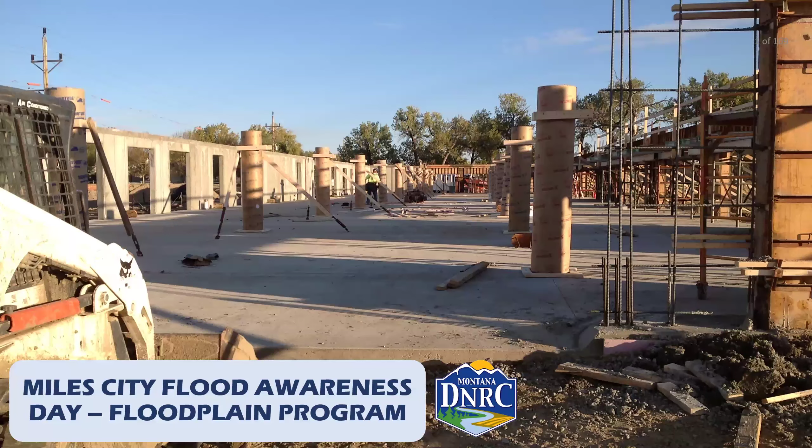As Sam mentioned, my name is Tracy Sears, and I'm part of the DNRC Floodplain program, specifically the Community Assistance Program. There's three of us in the program: myself, a coworker Shailia Wingard, and rounding out our team is Anthony Joyce.

We try to work with local communities, and we also have property owners that reach out to us from time to time. One of the things we try to do consistently is put additional information out there, especially on our website. I know Miles City has a great website, but if you're looking for additional floodplain information, please jump over to our website and hopefully we'll have some information for you there as well.

Not only am I part of the DNRC program, but I'm also the Montana National Flood Insurance Program Coordinator. One of the things the Community Assistance Program does is work very closely with local communities and floodplain administrators such as Sam Malinowski and Miles City.

So today we really want to briefly go over floodplain management, the floodplain regulations and building structures, compliance, and the benefits of the community rating system.

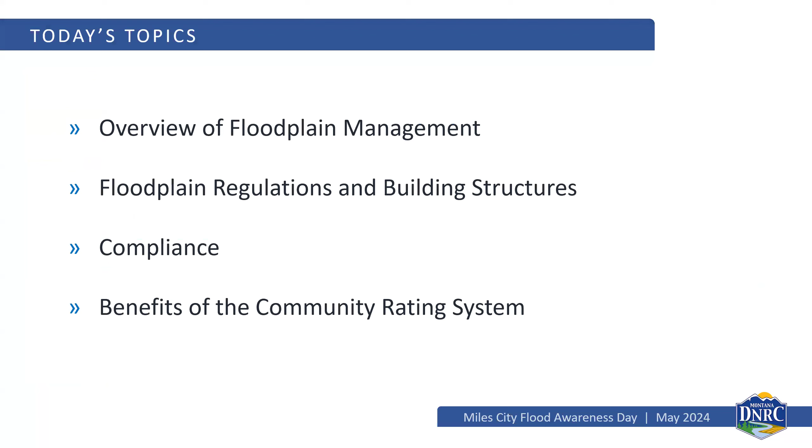We just want to start off talking about floodplain management in the nation, starting essentially with the National Flood Insurance Program back in 1968. But even before 1968, we had tried to figure out as a nation how to deal with this issue that we had called flooding.

Most communities were impacted by it. And since 1924, we didn't have private insurance companies — they were no longer selling flood insurance. So for quite a while, as a nation, this was the top priority: how do we deal with flooding?

And of course, what they came up with is what they had originally called the Unified Floodplain Program. When it went before Congress, they really emphasized flood insurance. I know that Aaron May is going to come up after this presentation to talk about insurance, and we'll touch on it just a little bit.

One of the things about that unified program was that there are four parts to it, even though they emphasized flood insurance. One is flood insurance, another is knowing your risk — floodplain identification and mapping — and then floodplain management, which plays a huge role that falls on the local community, such as Miles City or Custer County. And then, of course, flood mitigation.

As we get into all this information about floodplain management, and specific information about building in and around these high-risk areas, the biggest thing to remember is that the whole premise of this program is to reduce flood losses and flood damage. That was the whole reason this program was established.

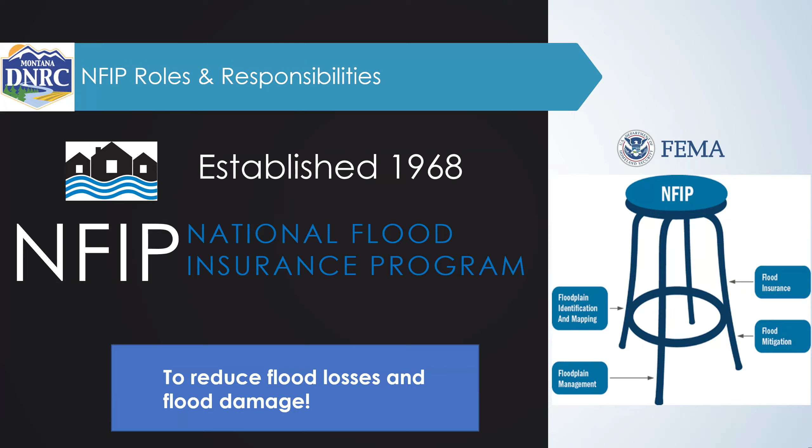I know we have a lot to cover in a short amount of time, but I wanted to emphasize that in the state of Montana, they were looking at this national program and saying, wait a minute, we as a state need to step up. One of the things we needed to do was provide assistance to the local communities. We know this program is going to be complex. So back in 1971, when they passed the state standards for Montana for floodplain regulations...

One of the things they emphasized is an entity that would provide technical assistance to the local community, and they said DNRC was going to be assigned that task. The other thing they did was take those originally proposed regulations that came out of that unified program that went to Congress and said, we're going to adopt those standards. What ended up happening was Montana is one of three states that have these higher standards.

One of those standards that a lot of you in Miles City are well aware of is this 2 foot of freeboard. All of this, when the state actually adopted this program, occurred right around 1971. Ironically, nationally, what we're seeing is that these higher standards that Montana has had in place since 1971 are now slowly becoming national standards.

HUD just adopted some regulations for any of their programs, and one of the things they incorporated was this 2 foot of freeboard, same thing we have in the state. I know there are changes coming down nationally, and one of the biggest things proposed was to bring back that 2 foot of freeboard.

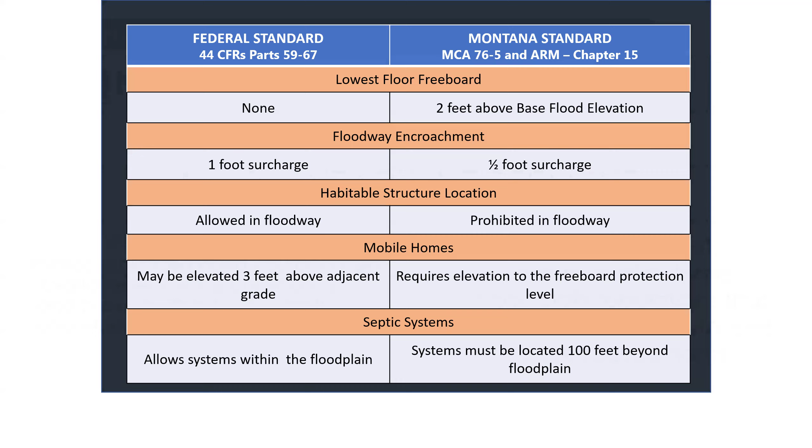Even though we see it as a higher standard in the state of Montana, it was actually a minimum standard that was proposed when they were originally talking about the program to Congress. So in Montana we'll be pretty good because we've been dealing with that 2 foot of freeboard for a very long time. So when we look at the National Flood Insurance Program, it's important to understand that this is a voluntary agreement.

When a community enters into joining the National Flood Insurance Program, they're saying we're going to adopt and enforce these floodplain regulations that meet or exceed FEMA and state regulations. In return, the federal government says we'll make available flood insurance to anyone within the community, not just the high-risk area, if your community is participating. Also, we'll try to provide some disaster assistance and other funding opportunities. That's the basic agreement between the federal government and the local community.

What makes up that special flood hazard area: you have the area designated as floodway, and we'll get into this in a moment. That's kind of where you're seeing the deeper depths and higher velocities. Then you have an area outside of that called flood fringe, and those are areas where you'll still see inundation, but it might not be the velocities you'll see with the floodway.

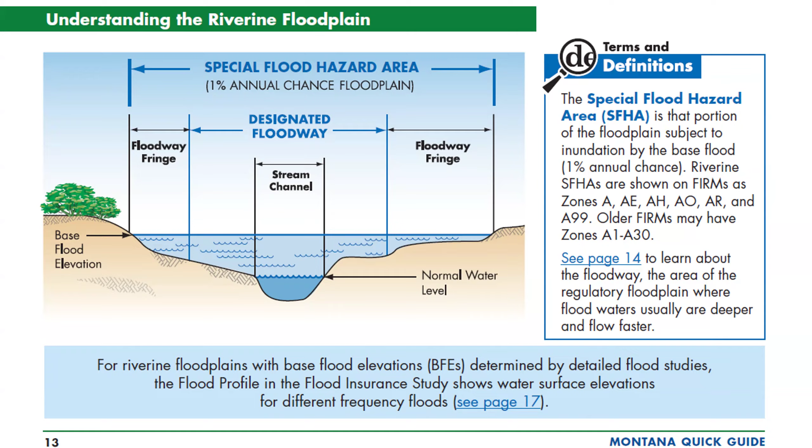The reason I bring this up is because these areas are tied into your regulations at the local level. Miles City and Custer County have both adopted floodplain regulations, and there are certain requirements and things prohibited in the floodway, same with the flood fringe. So it's important when doing any development in these areas to understand what location you're in. It's great that you have good resources, especially in Miles City with Sam Malinowski, and with the county, Mike Rinaldi, and I think the commissioners help out with this as well.

So the area outside of this high risk area that's not identified would be considered low risk, and sometimes it's also referred to as moderate risk as well.

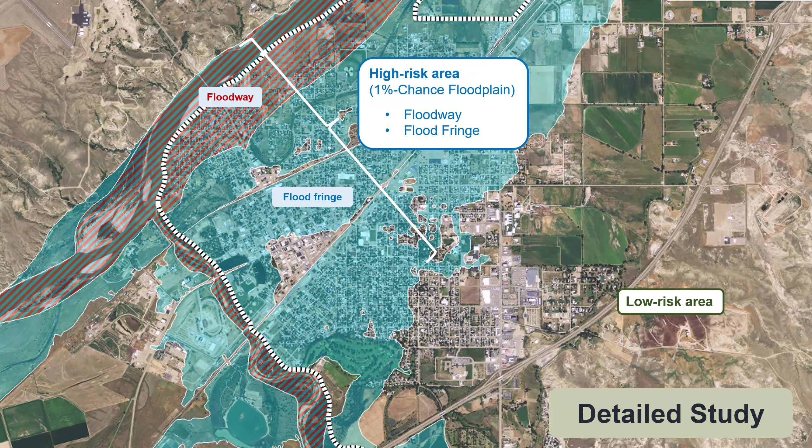So why is it a big concern with these high risk areas? The whole program, the local floodplain program, the National Flood Insurance Program, it's all based on how do we manage existing structures and new structures and development within these high risk areas. The reason for this is because there's a 25% chance of flooding during a 30-year mortgage for structures in these high risk areas. That's not to say everything outside those areas isn't vulnerable. Every property is vulnerable to flooding, but there's a higher chance of flooding in these particular areas.

Also, mandatory flood insurance requirements apply to any structures in the special flood hazard or high risk area, for federally backed mortgages. Floodplain permits are necessary for any type of development, and development is any type of man-made activity. So if somebody's doing anything on their property, before you do anything, we encourage you to reach out to your local floodplain administrators and talk to them about what you're proposing. They will be able to provide guidance and information, which could possibly lead to getting a permit application and going through that permitting process.

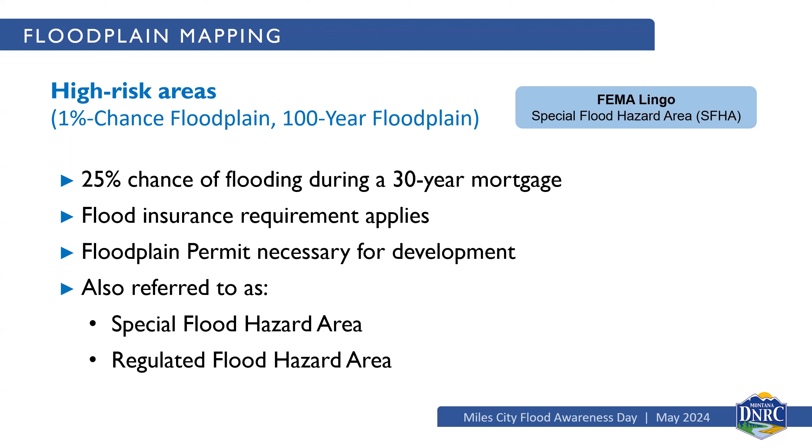We also refer to those high-risk areas as the special flood hazard area, and in both Custer County and Miles City floodplain regulations, they talk about the regulated flood hazard area. It's the same thing, but it provides an opportunity in that regulated flood hazard area to pull in other information that might be used for management of the floodplains in that particular area. That moderate risk and low risk area is not identified as a high risk area. These again are lower risk.

They can account for, as you can see, 20% of flood insurance claims nationwide. And I think this number's kind of gone up a little bit over the last few years, and I know Erin can kind of help clarify that as well.

Flood insurance is recommended. Now, one of the things that we do talk about, and I know that the next presenter is probably going to talk on this too, but any lender can come back and say, look, we want you, if you have a loan with us, we want you to carry flood insurance as well.

Now, for Miles City and Custer County, floodplain regulations do not apply in these areas. We do have a couple communities in state that do regulate outside a high-risk area, but it is not Miles City or Custer County. And this area also includes what they would refer to as the 500-year floodplain, or the 0.2% chance floodplain.

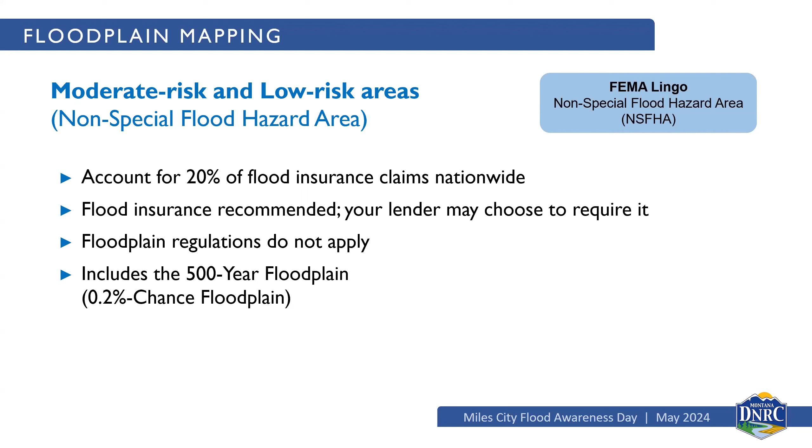And as we get into looking at how to build specifically in these areas, we do want to look at one of the biggest issues or items that you'll have to deal with in any type of development in these areas. You're looking at that particular project and how it relates not just to where it's located in the floodplain, but also what you're planning on doing and where is it in reference to that base flood elevation. So that's the elevation on that property of where that 1% chance of flood can occur.

And really, it changes depending on where the property is located. It's shown on the maps as an estimate, but the exact location, or the exact base flood elevation, you can obtain through that flood insurance study.

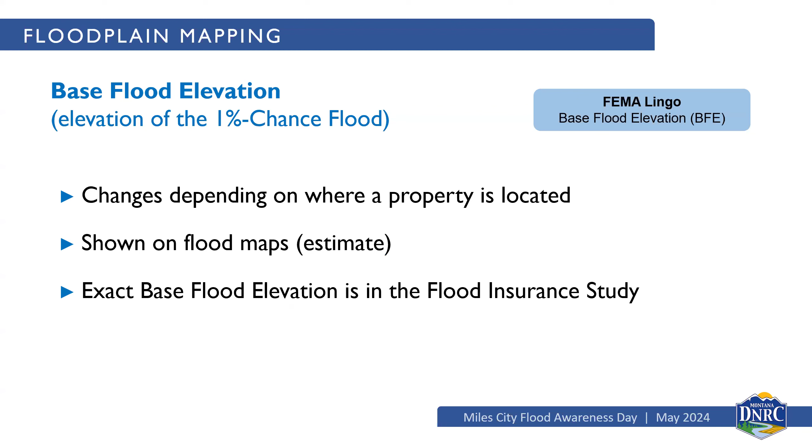Miles City also has copies of their specific flood insurance study for Custer County. You can access this information through Miles City and on their website. You can access it through the FEMA portal as well. This will give you information about what are those cross sections, where's the base flood elevation in this particular location. It gives you a data source. It's a really good reference.

And again, you don't have to be an expert on this. You can always reach out to your local floodplain administrator. They can kind of help you look at your area and understand what that base flood elevation might be in that particular area.

There's also, as we mentioned, the ordinance that not only Miles City has, but also Custer County. They're two separate ordinances. But those ordinances for floodplain management actually list all the regulations that you'll need to do. It also gives a lot of information about what you need to submit, what is going to trigger a permit, which again, any type of man-made development in those high-risk areas. It gives a lot of information about that local floodplain program. It actually even identifies what office or entity is responsible for floodplain management within the community.

On our website, and I think Sam has a few of these in her office too, there is a quick guide. It gives a brief overview of all the regulations, and it really correlates to those local ordinances. So if you're looking at what is a substantial improvement, you can quickly find that. Or if you're looking at information on what an elevation certificate means, you can quickly look that information up. Sam might have some hard copies in her office, but we also have this linked online through our website as well.

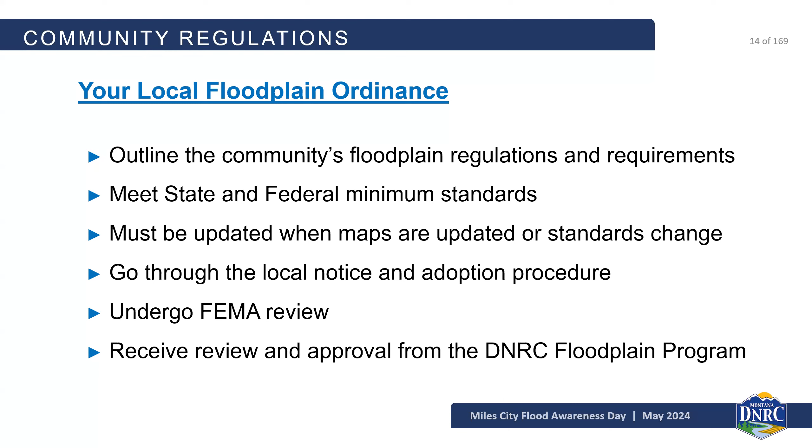And within those local ordinances, the main thing is talking about the floodplain permitting process. And as we mentioned a couple of times this evening, talking about what triggers a floodplain permit. And it really comes down to any type of development that would be considered man-made activity.

Just again, reach out to Sam. She'll be able to help you.

One of the things that's hard about the permitting process for local communities is that there's this federal regulation that states that before the local community can issue that floodplain permit, they have to be assured that all other local, state, and federal permits were acquired for that particular and proposed project. There's a lot of materials out there that can help you if you're working along streams.

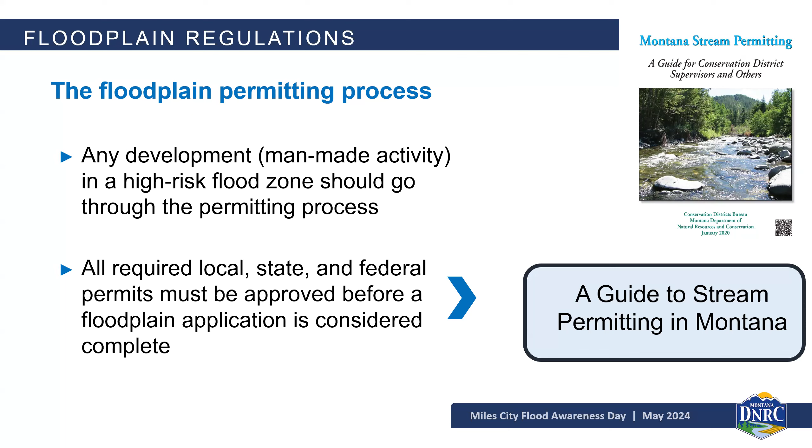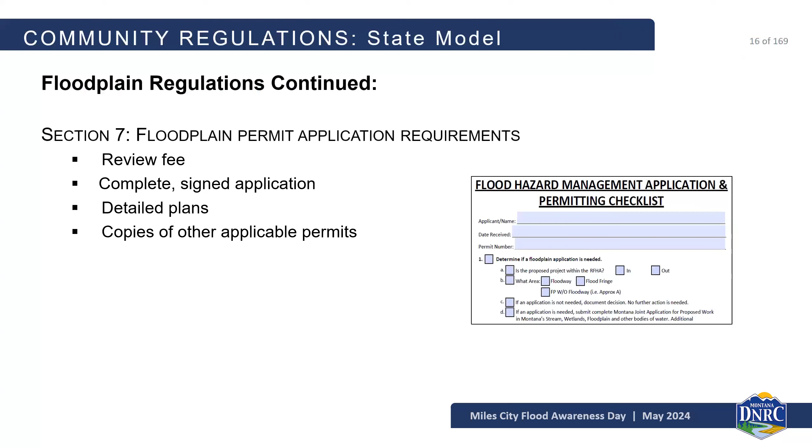Now, there's some key documents. This is stuff that your local floodplain administrators can help you with. If you have a project, we encourage you to talk with them beforehand. That's going to make the permitting process go a lot smoother for you. Let them know what you're looking at and planning on doing. They can help guide you on what information within those regulations will pertain to that particular project you're working on, and what you need to submit for the community to review and make a decision on that application.

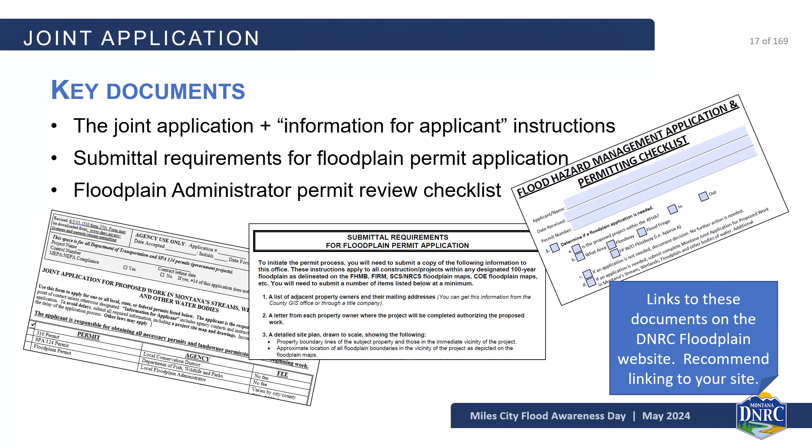I always tell people, make sure that when you're filling this information out, especially that joint application, make sure you're filling it out and addressing all of this information. It should be that somebody can pick up your application, whether it's the community or somebody from the public, and really be able to understand exactly what you're proposing and what you're doing there as well.

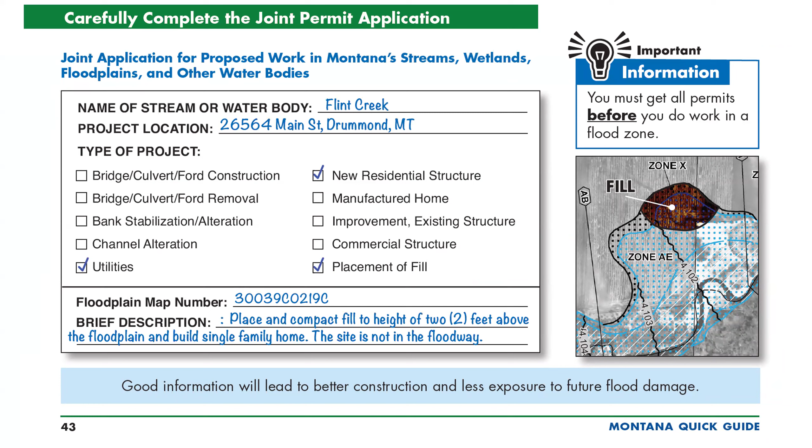Some of the things we talk about is looking at what are some of those steps for review. I know, as a property owner, one of the things I look at is I really want to know, like, if I have to put up a fence, what are the regulations that I need to follow, or what are they going to look for?

This is just kind of a key step in what that reviewer is going to look for. The main thing is making sure that whatever's being done on that particular property, it's not going to adversely affect not only your property, but adjacent property as well, and that it's being built safely.

One of the reasons we really emphasize this is understanding that any new structure that's built, especially for residential structures, the lifespan of a residential structure is typically anywhere between 50 and 70 years now. And so it's not just going to be one person that owns that structure, it's going to be multiple people. So you want to make sure it's done in a safe manner.

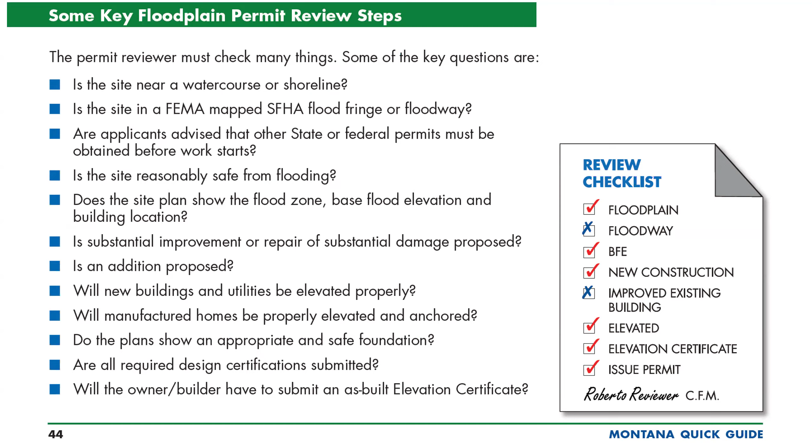So when you get into those regulations, one of the things Sam had asked us to really focus on is the development requirements. In section 9, it talks about development requirements in the floodway. Now that's that area we showed that had the hash mark throughout Miles City. And there's some very specific guidance on if you're proposing any development within that area.

One of the things that's really important to understand is that any encroachments or anything you're doing there cannot create what we call a rise to that base flood elevation. So in that floodway, you can't create a rise. There's a document we'll talk about here in just a second. There's also guidance for different types of uses, such as mining, railroad, highway, and stream crossings, looking at embankments or utility lines, storage of materials, stream bank stabilization, and also flood control.

And then there's also a section on existing residential and non-residential buildings. It's important to understand that this program was looking at what do we do with new development, new structures, and what do we do with existing development that was there before these regulations or these maps, and existing structures. The program looks at all those aspects of how do you make each one of these developments safer for the future. That's what the regulations really try to get at here as well.

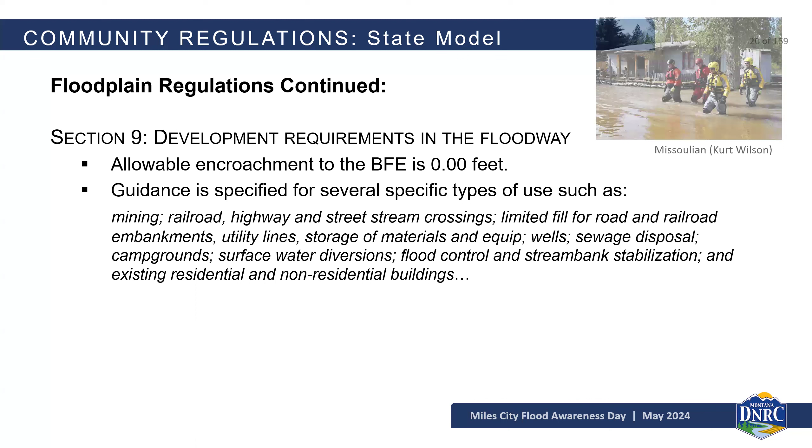So as we mentioned, when we're talking about the floodway, there are some prohibited uses. The floodway is that area where we know we can see the deeper depths and the higher velocities. And I understand Miles City has a very unique situation with that island area, and that area being mapped. We have had long discussions on this, and Sam and I have talked about this over and over again too.

I wish that would have been a little bit different. But typically, for the most part, when we're looking at a floodway, that is the highest risk. It's one of those areas you really want to keep clear from development, because they are not only at risk from losing whatever development they do there, but it could impact other property owners as well.

Now, it is different from that flood fringe. That flood fringe, again, is that blue area you see at the corner of this picture. Now, the insurance requirements are the same. They still have that mandatory requirement for any federally backed loans, but there are more restrictive floodplain regulations when you're in that floodway.

One of the things they state is that you cannot establish any new structures. Now, we talked about existing structures - they are handled in a different manner. You might be able to replace those. They still have to come into compliance if it's in the floodway. There are a lot of factors that go into it.

Again, if you have a structure in the floodway, definitely reach out to Sam and talk with her about what you're proposing to do before you do any excavation or do anything in that area. It makes it a lot smoother and a lot cheaper for you as a property owner to talk that over with that floodplain administrator.

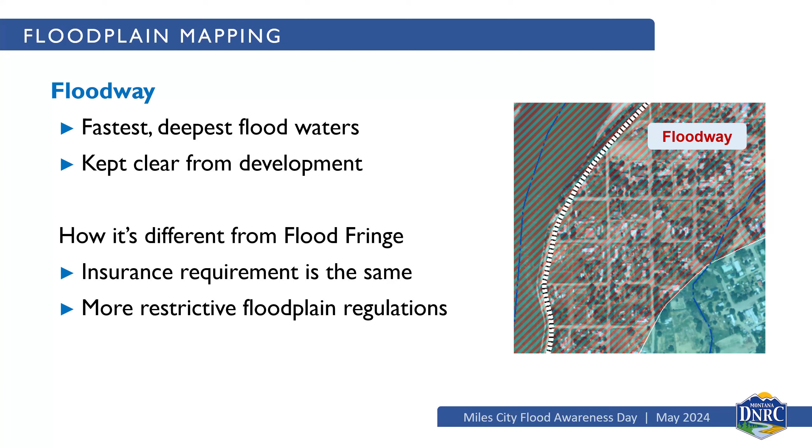So one of the things we talk about is if you're doing any development in that floodway, one of the requirements is that a project may be required to do a no-rise certification. So if they're doing new development, one of the basic requirements for floodplain permits and applications is that they have to show that what they're proposing to do is not going to create a rise to that base flood elevation.

This is something that the property owner can only obtain by hiring an engineer. This is not something a surveyor can do. A no-rise certification is something that has to be done by an engineer.

So again, you might be proposing some sort of development within that floodway. Go back to your floodplain administrator and say, hey, this is what we want to do. Anything that you can do to not trigger this requirement for no-rise is just going to make that process a little bit smoother and a lot cheaper for you as well.

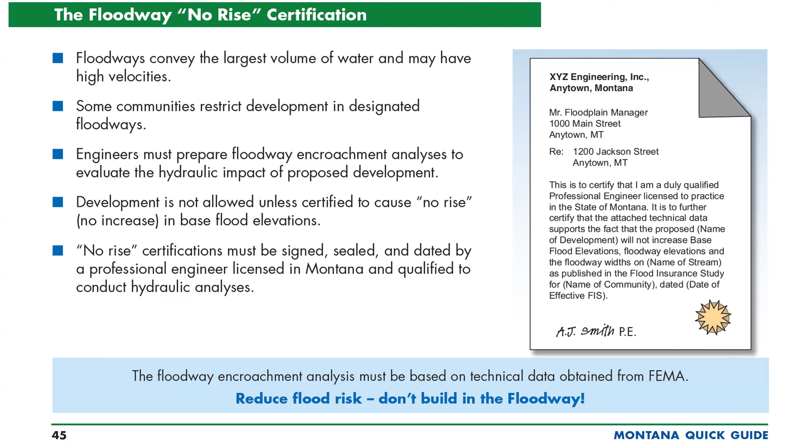So as we get into section 10 of the local floodplain regulations, now we're talking about development requirements in that flood fringe area - not the floodway, but that flood fringe area.

Again, all those uses that are permitted in the floodway carry over. As it says right here, if it's permittable in the floodway, it's permittable in the flood fringe. But anything that you do, the encroachment limit is limited to a half-foot rise.

Now, structures are allowed, new structures. Those residential structures that are being proposed will require 2 feet of freeboard. And also non-residential structures, not only do they have that 2 feet of freeboard, but they can also look at maybe doing some sort of flood proofing. So it's a little bit different than the residential structure.

The other thing to think about is if a property owner is looking at elevating a new structure on fill, it has to be 0.5 feet above the base flood elevation and extend 15 feet beyond the structure. So if they're looking at fill, they should also have the plans included about what they're doing with that structure. Where is that lowest floor going to be? How is that fill in relation to the footprint of that building? These are things that have to be considered.

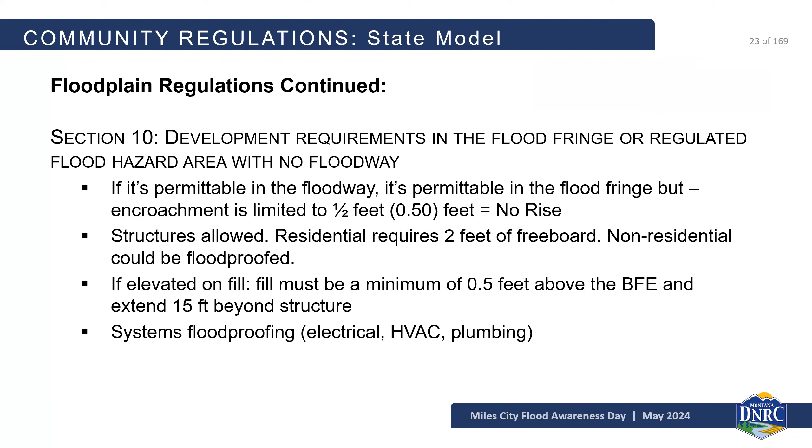Also, they're going to need to look at floodproofing their electrical, HVAC, and plumbing as well. So in that flood fringe area, it's not that you really can't build, you just probably have to build a little differently. I think all of you that live in Miles City are pretty aware of that requirement.

And again, this process is about saying, hey, we're trying to reduce flood losses and flood damage. It's not going to be just one homeowner, as we discussed. It's going to be multiple homeowners or business owners, and really trying to make sure that what you're putting in now is going to be safe now and into the future as well.

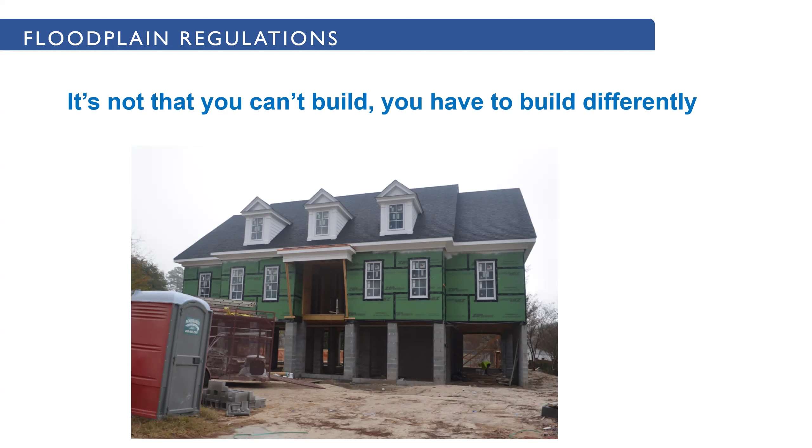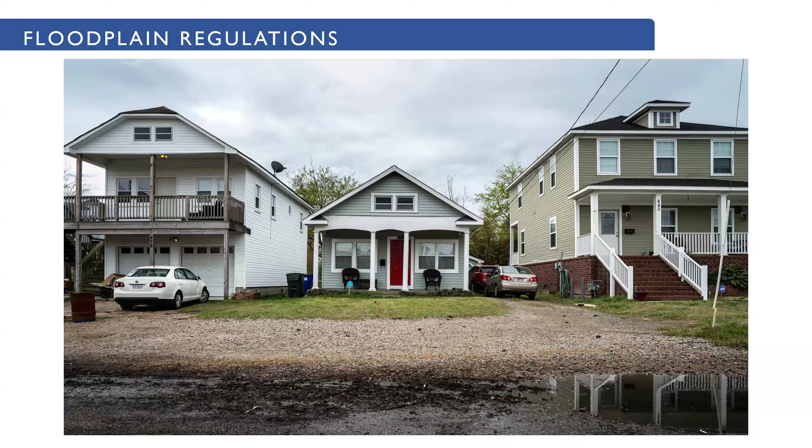But let's say somebody has an existing structure. That's something we're going to get into here in just a moment, and that's going to be called substantial improvement.

If you're building a new structure, some ways you can elevate it are on foundation walls, as long as you have openings—there are regulations about what needs to be done in that lower enclosed area. If you're elevating on fill, there's that 15-foot perimeter of fill from the footprint of the building, plus slope requirements. So there's a couple ways you can look at elevating a structure.

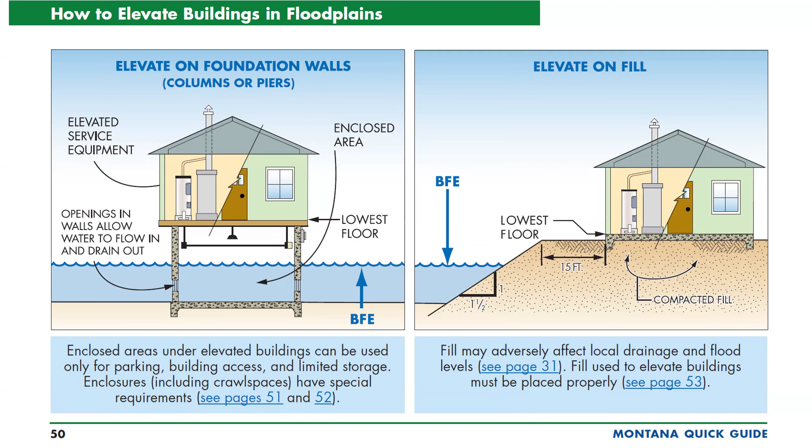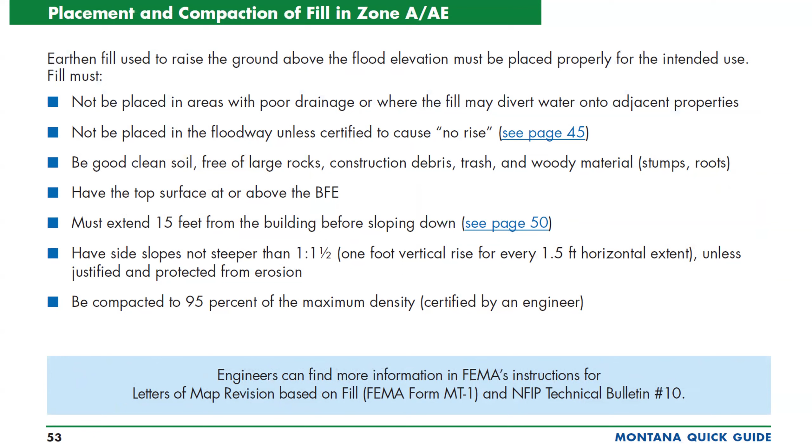When you look at the floodplain regulations, it really stresses what's required when you're adding fill. That's something you can talk to your local floodplain administrator about as well.

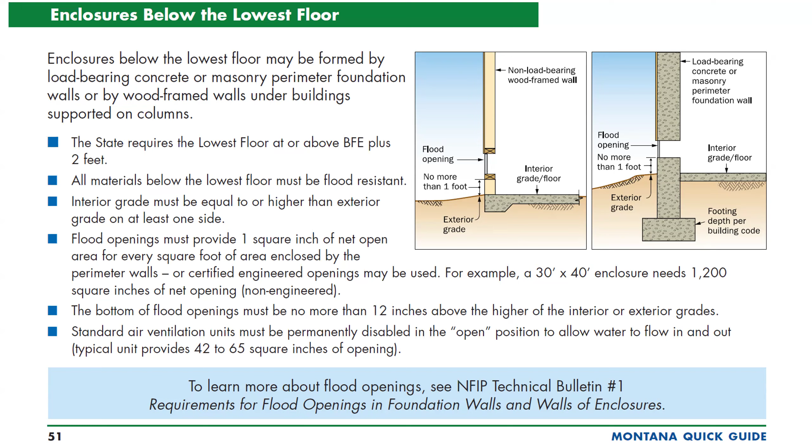Now, enclosures below that lowest floor—the interior grade or floor in the state of Montana has to be at the BFE. Even if it's at the BFE, they still need to adjust for that lowest enclosure area, that 2 feet of freeboard, which is done by adding flood openings or flood vents, something Sam has talked about numerous times within the community. A property owner could instead build the interior grade or floor to 2 feet above, and they wouldn't have to do the vent. So there's some things you can discuss on what's right for your particular project.

A lot of these flood openings have certain placement requirements—they can't be any higher than a foot from either the exterior grade or the interior grade. These are things your application is going to address, and the local floodplain administrator is going to have to evaluate. This information is in the quick guide and also in the local floodplain regulations, so it's really important to understand those documents, especially if you're building in a high risk area.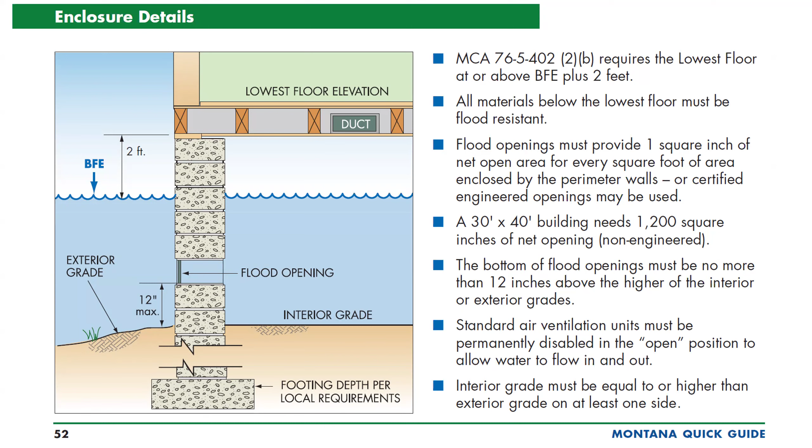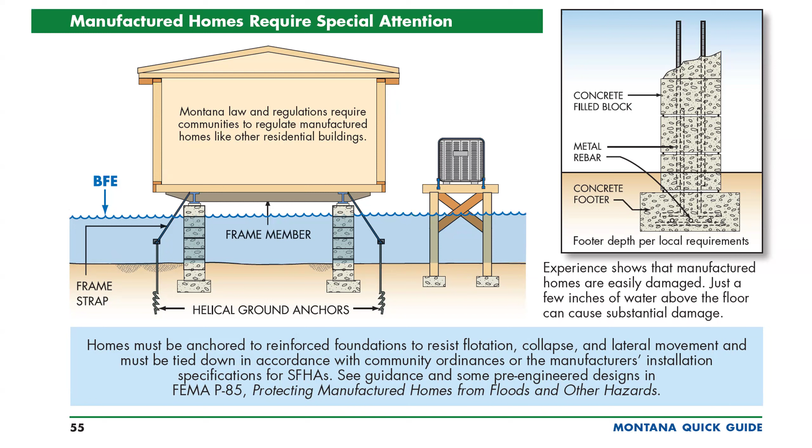Also, manufactured homes—in the state of Montana, they're looked at the same way as any other residential structure. They need to be anchored; that's one of the big things. You're looking at, if a flood comes along, how can we protect the structure from damage. So those are some of the things addressed here.

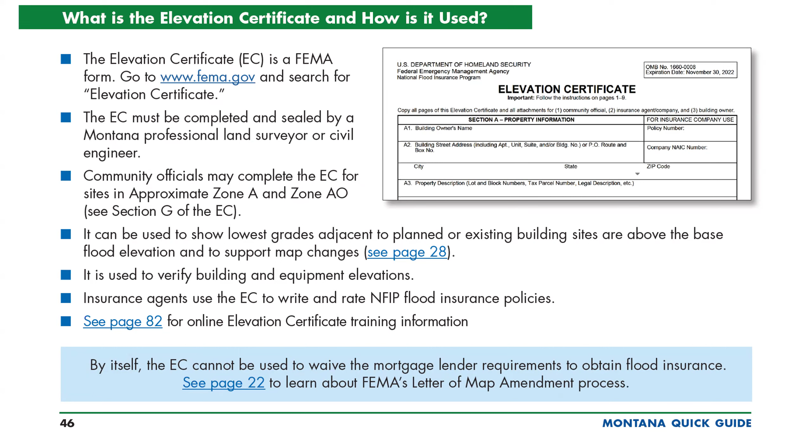If you've gotten a floodplain permit before, especially for a structure, one of the things required is an elevation certificate. FEMA provides this form, but it's filled out by either an engineer or a surveyor. It's a general requirement if you're putting a structure in that flood fringe area or floodplain—one of the conditions on your permit is that you have to complete an elevation certificate showing compliance with the program.

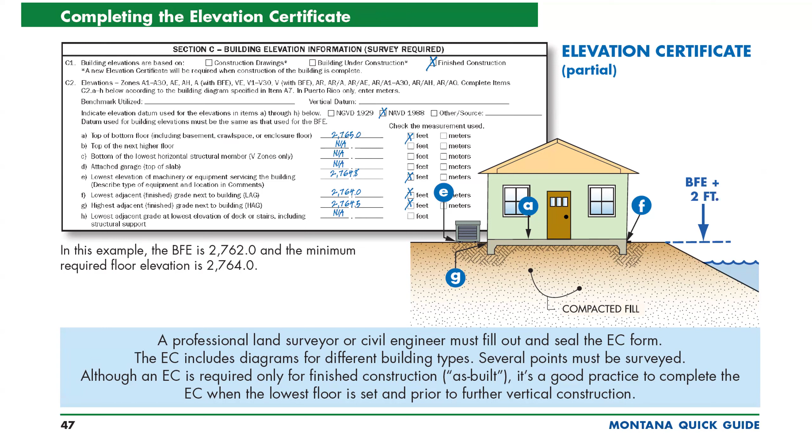There's a lot of information involved, and hopefully your surveyor or engineer fills these out properly. Sam works really closely with engineers and surveyors within your community, so there are a lot of professionals with experience doing this, especially in Miles City.

This elevation certificate requirement doesn't apply retroactively—the community requires it as part of your permit, but if you have an existing structure built before the maps or regulations were in place and you hire someone to do an elevation certificate for it, I'd encourage you to file it with your deed, give a copy to your local floodplain administrator, and make sure someone else has a copy, because there's no national repository for this. Usually when an elevation certificate is completed, it gets sent to your lender or insurance agent, but those can change, so you want to keep your own copy and make sure others in the community have copies so it stays in perpetuity.

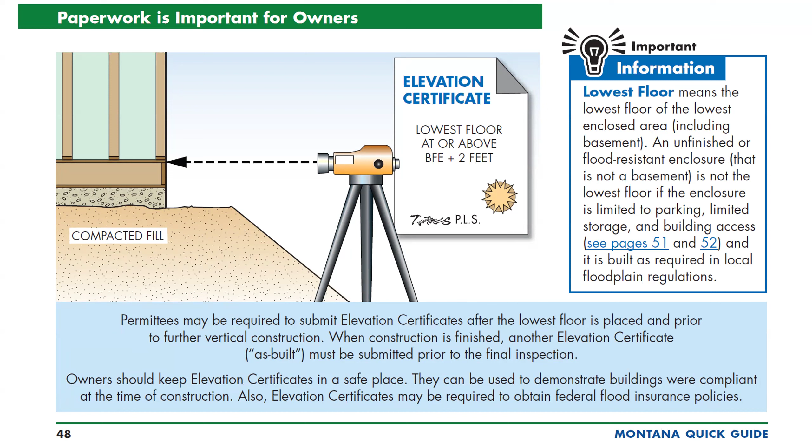Other things we talk about too are making sure that your heat pump, AC, or even propane tank are not only elevated, but anchored as well. Those are things your floodplain manager is going to go over with you.

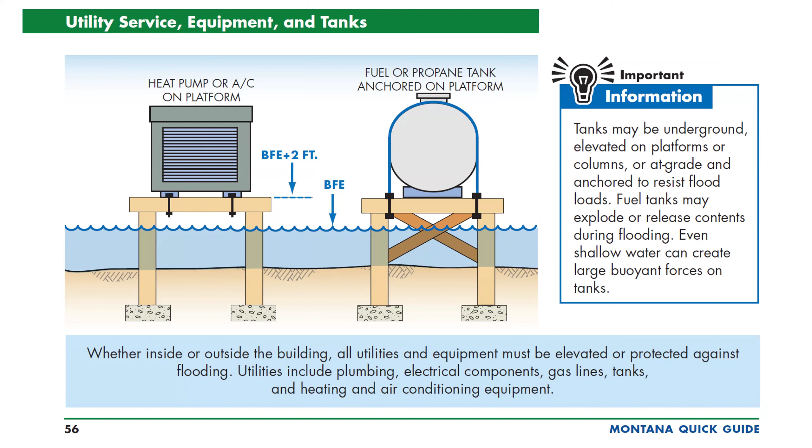It's stuff that's addressed in your local floodplain regulations. Other things addressed here are what do you do with accessory structures, what's considered an accessory structure, do you need to elevate it? All of these little things are put into the local regulations, and you have information on that in the quick guide as well.

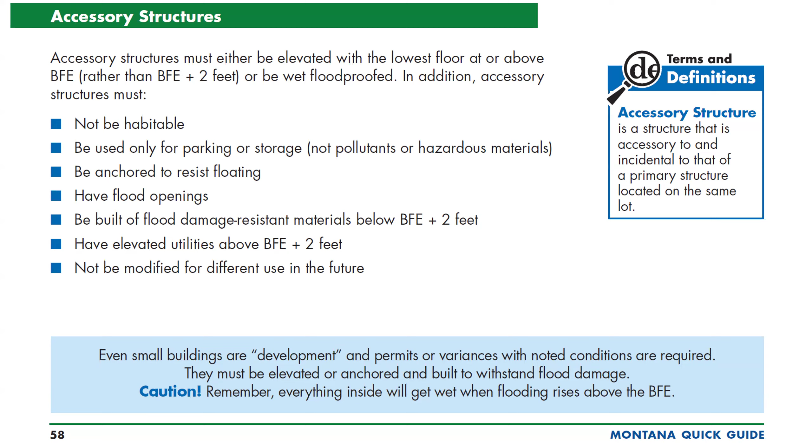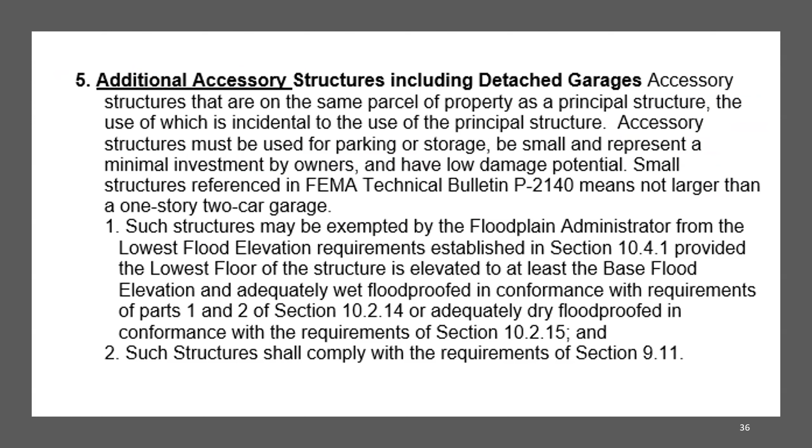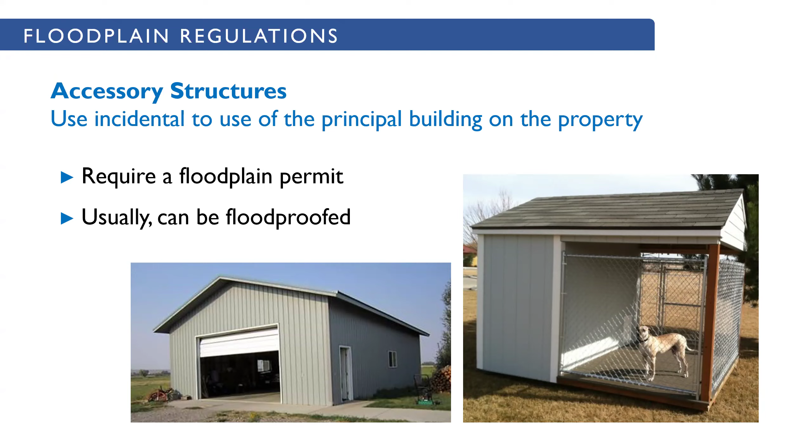And as we mentioned, that substantial improvement - now we're dealing with existing structures. I want to make some home improvements, or maybe add an addition. Well, any kind of improvement, including an addition to a home that increases the value of that home by more than 50%, is what we're going to consider a substantial improvement.

Now, this determination needs to be made by the local floodplain administrator, but as an applicant you're going to have to supply a lot of information so they can make that determination on whether this is 50% or more of an improvement to the structure. It always requires a floodplain permit, but if you hit that 50% or more, the existing structure will have to come into compliance with those local floodplain regulations, which means it might have to be elevated.

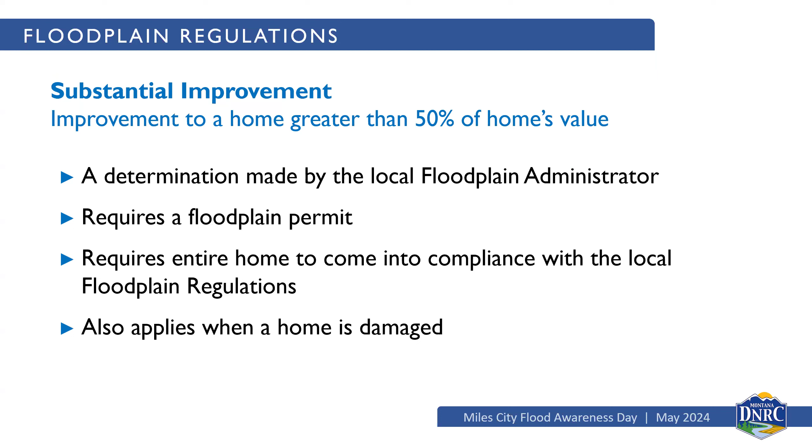This also applies when a home is damaged - doesn't matter if it's by a flood, fire, or earthquake. Whatever damages that home, they'll do an assessment on that damage. And if you're making any improvements and it hits that 50% threshold, it could require that entire structure to be elevated. There's a lot of information out there.

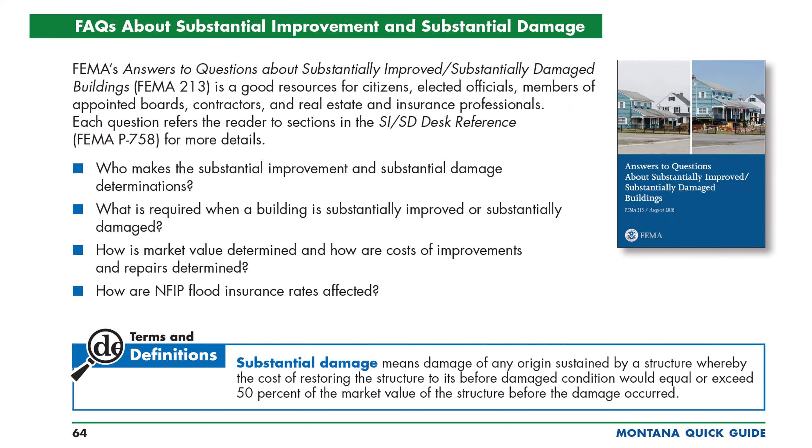I know I'm running out of time, but I wanted to showcase this because I know, Sam, you're probably going to have this information up on your website. But the biggest thing is to understand that if you're doing any work, reach out to that floodplain administrator. There's a lot of information about substantially improved and substantially damaged buildings. FEMA has a document on it - it's a really, really good resource.

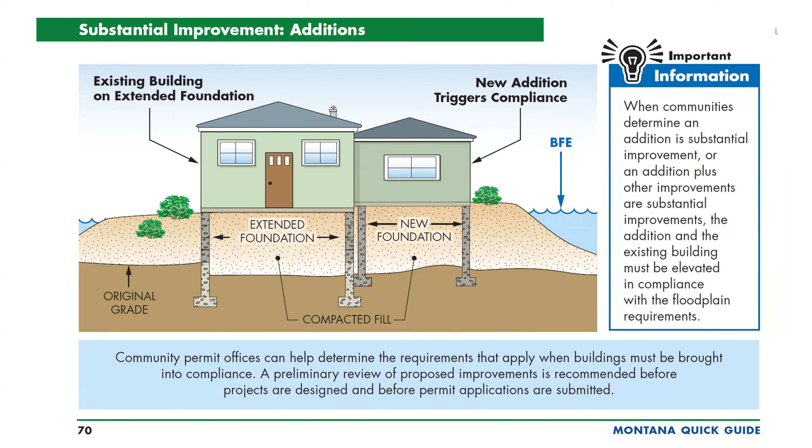I would encourage you, if you're looking at doing something, look at this resource and reach out to that local floodplain administrator, knowing that if you want to do a new addition and that triggers that 50%, it's going to require that existing structure to also be elevated. That's something that should be considered when you're looking at any of those additions, and into your cost as well. There's information on how you can elevate an existing building out there. It happens all over the nation, so it really just depends on your particular type of building.

The other thing we want to touch on is enforcement. That is a big component of the local floodplain program - to enforce those regulations. And this has become a huge hotspot, especially for FEMA and as a nation, and at the local level too, because as we're seeing increases in damages from natural disasters, there's a lot of stuff that's being looked at.

Like, was this structure allowed to be built? Was it built in compliance? Did they get a permit? All these things come into play when disaster assistance is being provided. And that happened in the 2022 flood events - that's what was being looked at as well, and it's being looked at all over the nation. Florida right now, two years ago they got hit by a major hurricane, and those impacted areas have some huge enforcement issues that are ongoing right now.

And property owners, after something has been damaged, look at self-help, insurance, litigation. One thing that was really eye-opening in the 2022 flood event: if somebody's home got damaged and they had an existing mortgage, there was help out there because of a presidential declaration. Usually the Small Business Administration comes in and says, we can give you a low interest loan. But that means property owners, whether residential or commercial, are looking at paying for two loans. That was eye-opening to a lot of people who didn't have insurance.

So there are different things to look at. We always encourage insurance, as people are able to recover a little bit quicker. But then the other thing we talk about is litigation, and we see that happening over and over again, continuing to happen as well. I'm not going to go into insurance because I know Erin's going to talk about it, but we recommend it in all flood zones.

One thing I wanted to touch on toward the end is the community rating system. As most of you know, Miles City is a CRS community, one of our strongest CRS communities in the state. What that does is provide every property owner within Miles City a discount on their flood insurance premium, which is fantastic. This program recognizes the good work the city is doing and provides a kind of subsidy to communities that go above and beyond the federal standard. Your CRS program is really important, and I think it's going to help property owners in the future as we see increases to flood insurance down the road.

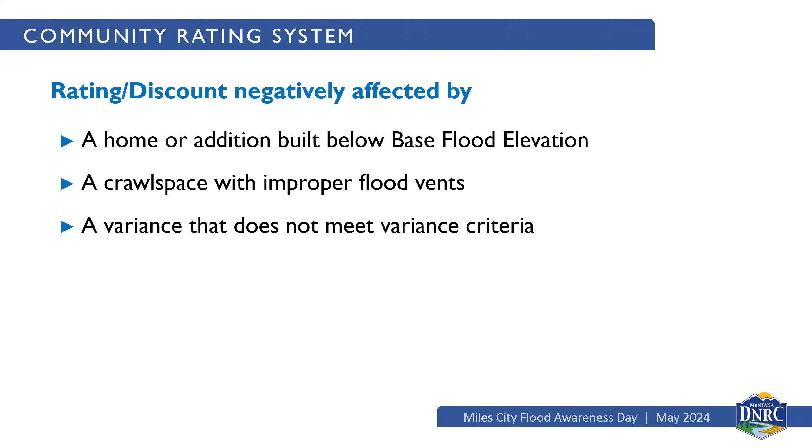So with that, I am going to go ahead and stop, Sam. I think I went a little bit over, tried to minimize it, but I don't know if anyone has any questions at this point.

Any questions for Tracy? She's your best resource for regulations. I think everyone was waiting for the insurance part, Tracy. Yeah, all right, I'm going to stop the recording here.